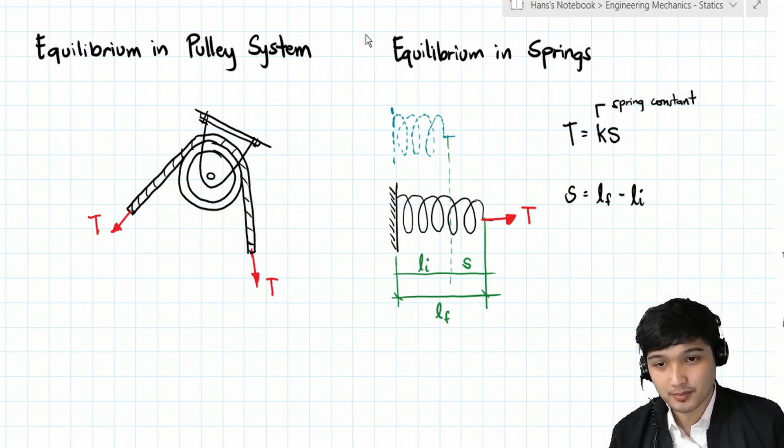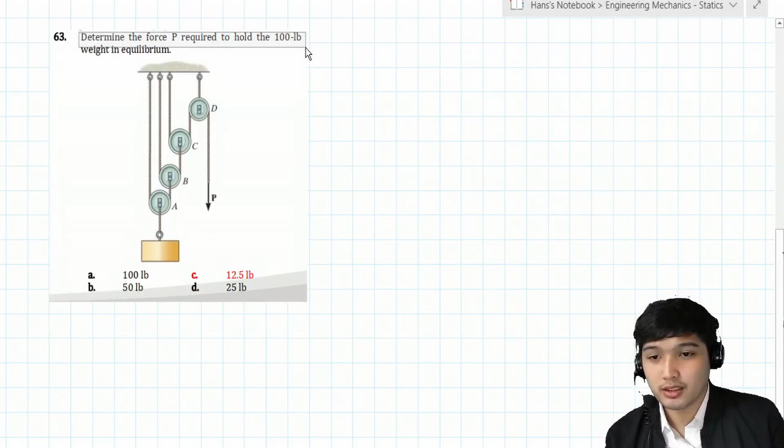Let's start class. Number 63: determine the force P required to hold the 100-pound weight in equilibrium. So here's the 100-pound weight. How large must this force P be to lift it?

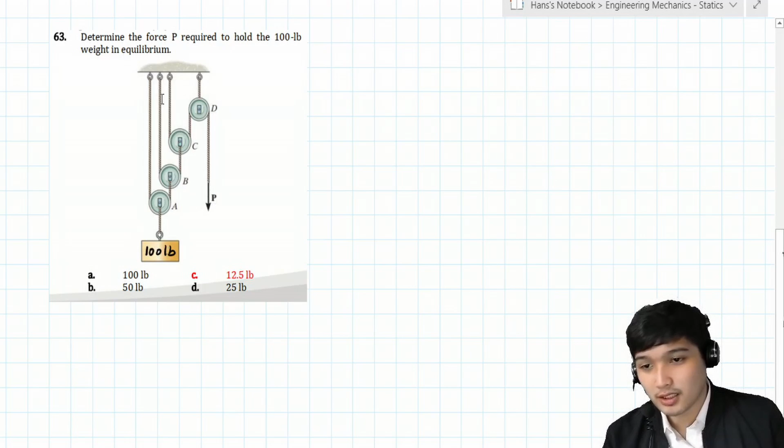To solve this, we analyze pulley by pulley. We cut it out, extract it, and analyze each pulley. Let's say for example we want to analyze pulley D first. Here it is, we cut it out and extract it.

Now we have here the downward force, which is force P. By property, it has a continuation, so as long as it's continuous, the resulting tension will be the same, P, by the property of the pulley.

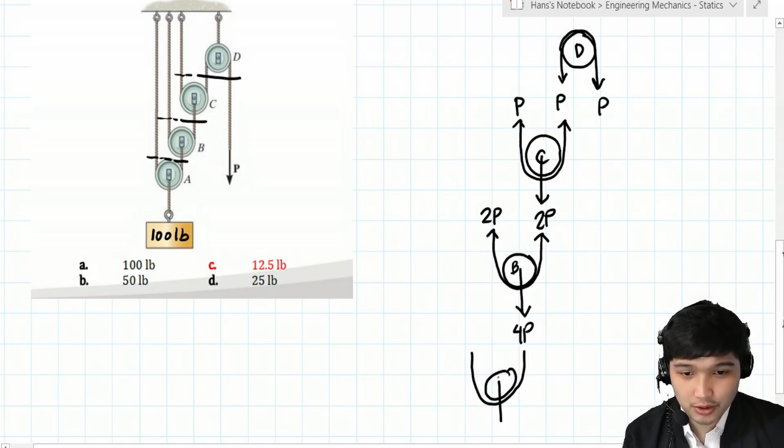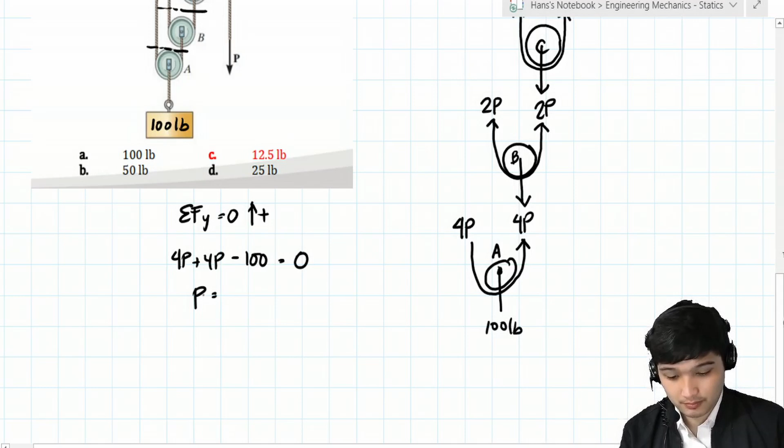So here, class, summation of forces along y should be zero, considering upward forces positive. Our analysis is on pulley A: that is 4P plus 4P minus 100 equals zero. With that, very simply, we get P, and that equals 12.5 pounds.

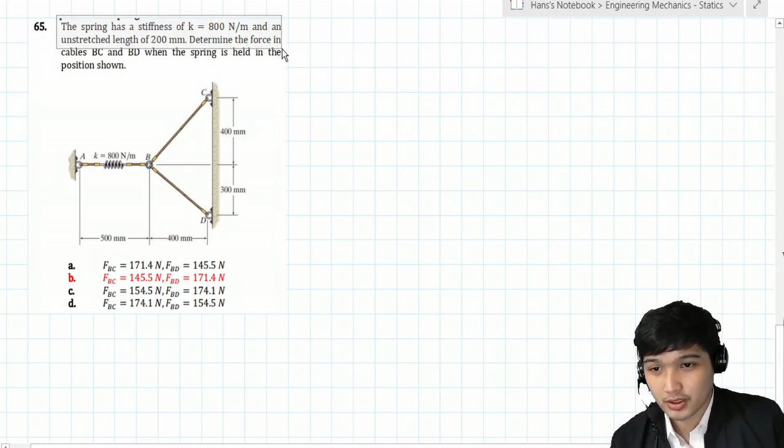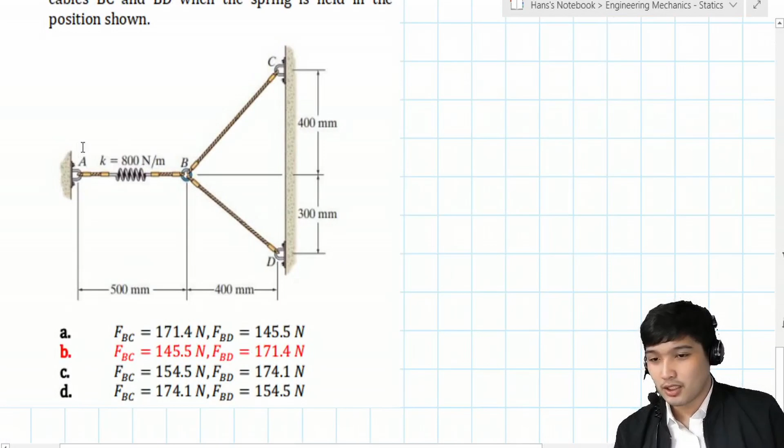Yung initial length niya, define na lang natin as LO or Li. Initial is 200 mm. Ngayon, ano nakita mo class? Mukhang na-stretch siya, tingnan mo yung spring dito. Ang naging bagong length niya is 500. So, lagay natin L final 500 mm.

So, kailangan natin makuha class yung tension sa spring. Actually class, yung sa spring, hindi naman siya always na tension lang palagi, pwede naman siya makompress. Kapag tension, yung makukuha mong S, yung deformation is positive, kaya Ks, K times positive value ng S, positive value, meaning tension. Kapag naman nako-compress, yung S na makukuha mo is negative, so K times negative value ng S, ibig sabihin negative value ng force, compression naman yun.

So, in this case, kaya natin kunin yung S, that is L final minus L initial. 500 minus 200, so that is 300 mm. Gawin na nating meters, 0.3 meters.

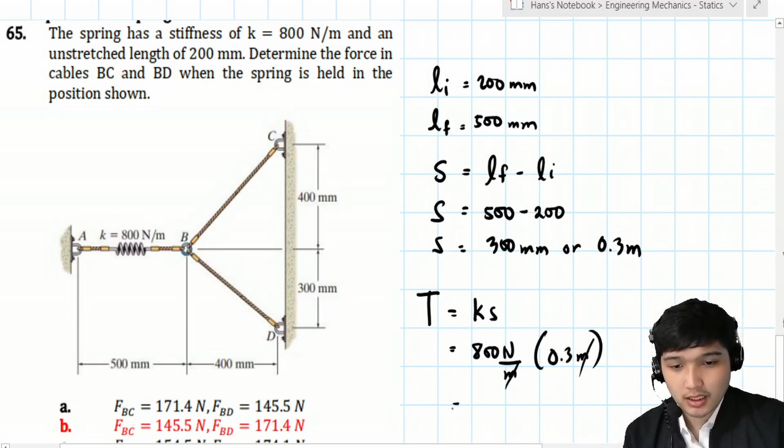Therefore, we can now solve for yung tension sa spring, which is Ks. K given 800 Newton per meter and then S is na-solve 0.3 meters, cancel ang meters, matitira in Newton. So ilan ang tensile force doon sa spring? That is 240 newtons. Nakuha na natin yung tensile force sa spring, pwede na tayong mag-analyze ng joint.

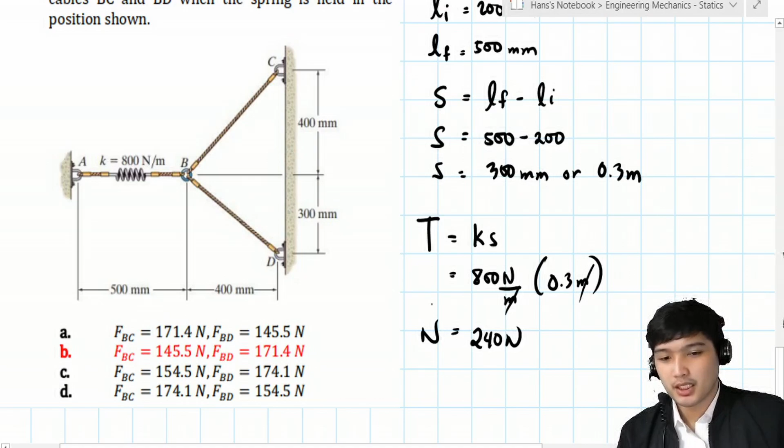So let's try to analyze itong joint B. Joint B tayo, class, ito drawing natin yung joint B. So drawing tayo ng free-body diagram. Ito yung B, attach sa B yung spring, so syempre tensile, away yung direction ng force dyan. Ito yung T na 240.

Ang gagawin kasi natin dyan, ikakatam natin tong B and C para malaman natin yung magiging internal force sa kanila. So mangyayari, kung hinihila mo pa ganito at pinutol mo yung member BC at BD, edi mapupunta siya dito. So ang gagawin nila, magre-react sila, hihila sila pabalik, so therefore magiging pa ganito sila. Considering yung joint B, magiging pa ganyan siya. Ito pa ganun din, kasi hinihila natin, pinuturin natin yan. Hinihila natin, so mag-react silang pa ganun.

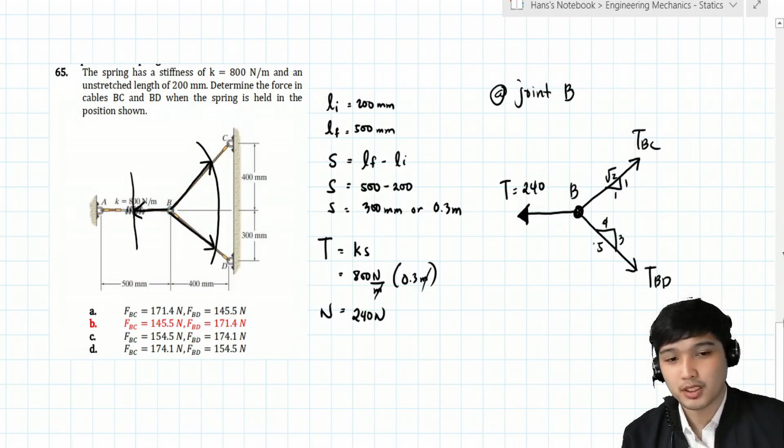So, therefore, ito na yung magiging tensile force sa BC saka sa BD. Ngayon, kunin lang natin yung mga slope siguro kasi wala namang binigay na angle. Para sa taas, 400, 400, so para siyang 1:1, and then ito, square root of 2. Dito sa baba, ano nakikita mo? 300, 400, so 3, 4, this one is 5, 3-4-5 triangle. So, therefore, pwede na nating i-analyze yan.

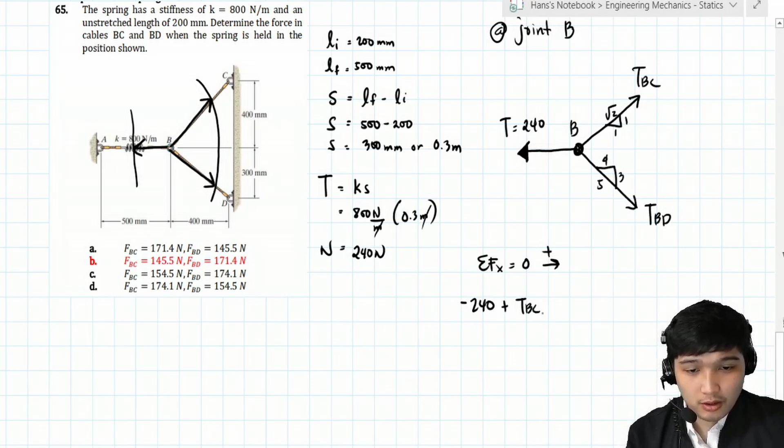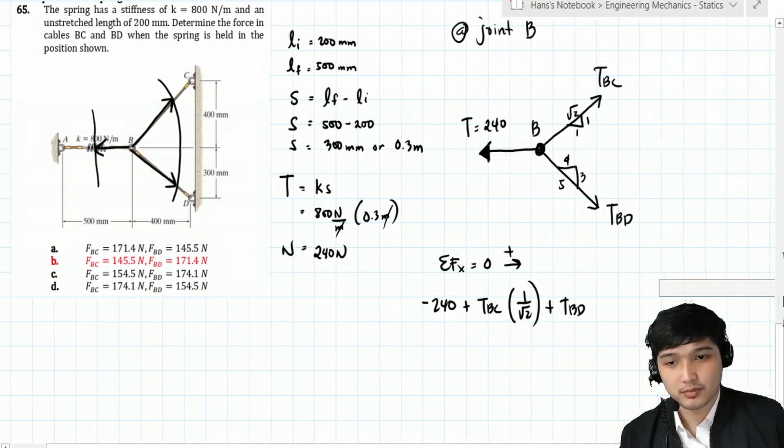Una, yung first equation of equilibrium, summation ng forces along x equals 0 considering force to the right positive. So, therefore, negative 240 plus yung TBC, ang horizontal component niya ay 1 over square root of 2, and then plus yung TBD, ang horizontal component ay 4 over 5, and then equals 0. So, therefore, we have equation 1.

Next, summation ng forces along y equals 0 considering upward forces positive. Yung 240, wala siyang vertical component. Yung TBC, meron, that is 1 over square root of 2. And then, minus yung TBD, vertical component is 3/5, and then equals 0. So, equation 2.

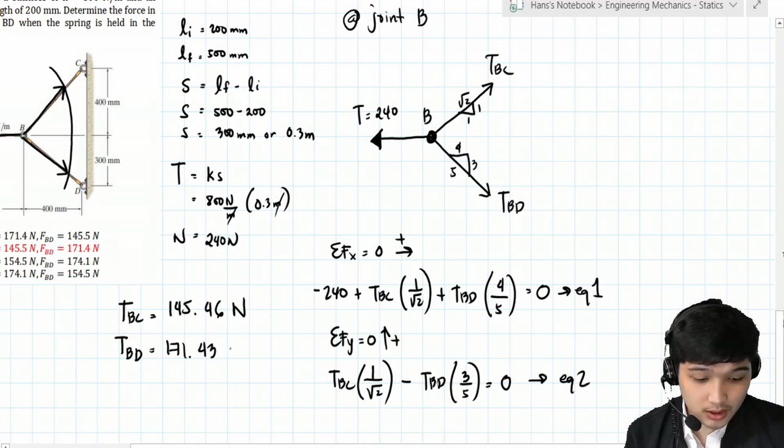So, two equations, two unknowns, class, solvable lang TBC and TBD. So, ilan yan, class? Sagot for the first one is 145.46, the unit is naka-newtons tayo. And next is 171.43 newtons.

So, from the choices, anong sagot? FBC, FBD, so 146, 171, so that is letter B. So, therefore, we are correct. So, ganun lang siya kasimple, so long as alam mo itong property ng spring naman.

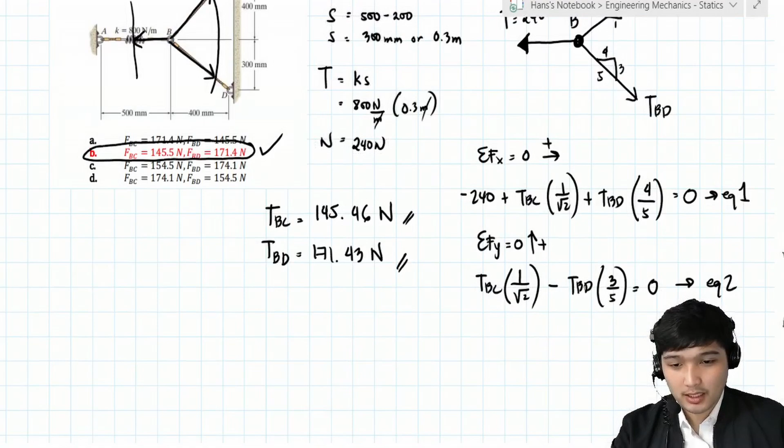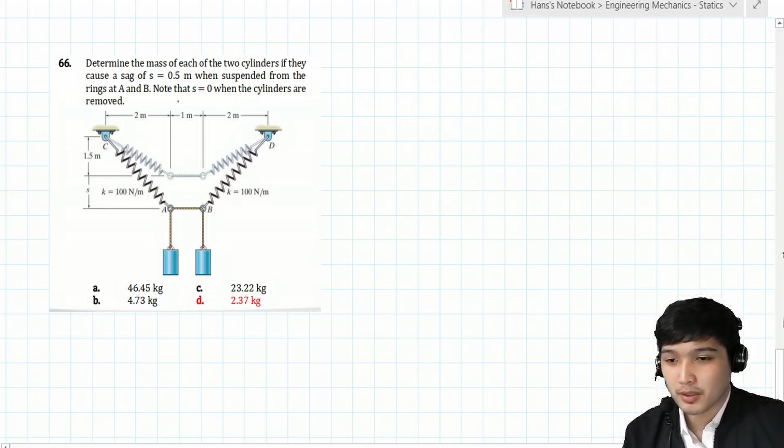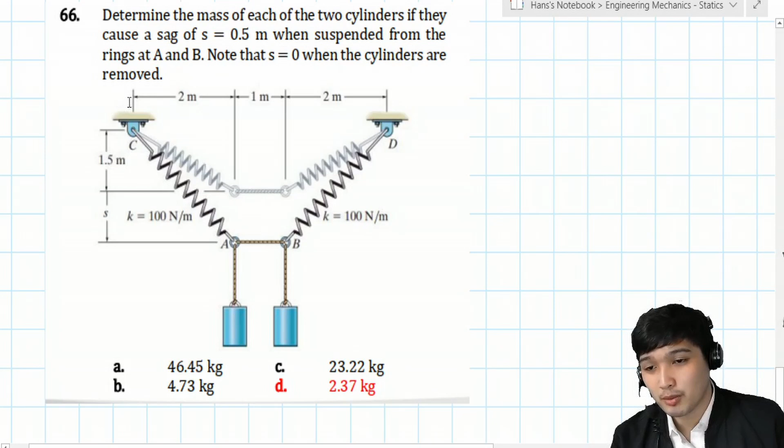So, we are given yung parang makikita mo sa background, yung malabo, parang yun yung original position, yun yung unstretched length nung spring. So, meron siyang vertical distance na 1.5, na 2, na horizontal. So, kaya natin kunin yung L initial, L initial is just yung Pythagorean ng 1.5 squared plus 2 squared. Okay, so ilan yan?

So, that is 2.5 - yung initial length niya. So 2.5 meters. After ma-apply yung load, yung bigat ng cylinder, humaba siya. Naging yung S equals 0.5. So ito na yung bagong triangle.

Okay, ayan na. So again, 2 pa rin yung horizontal, yung vertical lang yung nagbago. So makukuha natin class yung final length. May Pythagorean. L final equals - vertical na naging 2, and then yung horizontal na 2 pa rin. So ito magiging 2 square root of 2 meters.

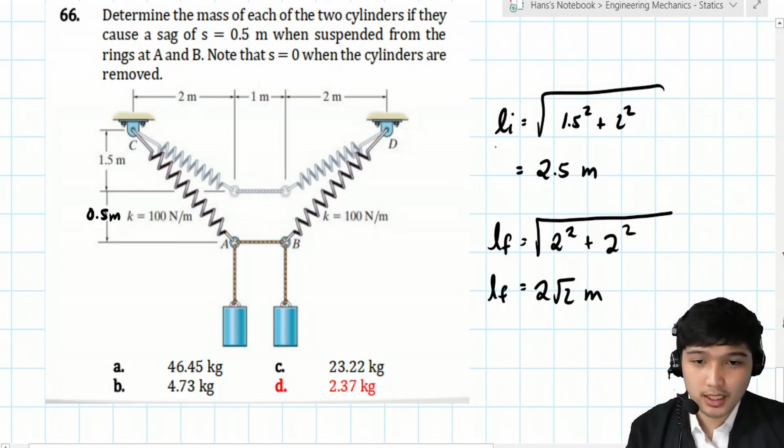So ayan, with that, kaya na natin kunin yung actual deformation na S. Nag-elongate siya, so sabihin nag-undergo siya ng tensile force. So L final minus L initial, 2 square root of 2 minus 2.5. Okay so ilan yan class? That is 0.3284 meters. So pwede na yan, class.

Kailangan lang natin magkaroon ng value ng S. So kung meron na tayo nito, therefore yung tensile force acting dun sa spring is equal sa Ks. We are given ba ng K? Meron, class, 100. At kung mapapansin mo class, yung figure natin symmetrical siya. Kung ano yung nangyari sa left side, yun din dito. So malaki yung chance na equal lang din to yung dalawang to, class.

Okay, hindi na natin papahirapan, nakita naman natin na symmetrical. So pwede natin sabihin na yung mass dito or yung weight dito, weight at A ay equal sa weight at B. Pwede na natin siyang tawagin, lagyan natin, ito by lang to observation. So we can say that yung weight as weight na lang, W.

Okay, balik tayo sa tension or tensile force dun sa spring. So K is 100 Newton per meter, and then S is 0.3284 meters. So yung tensile force is 32.84 newtons. Cancel to.

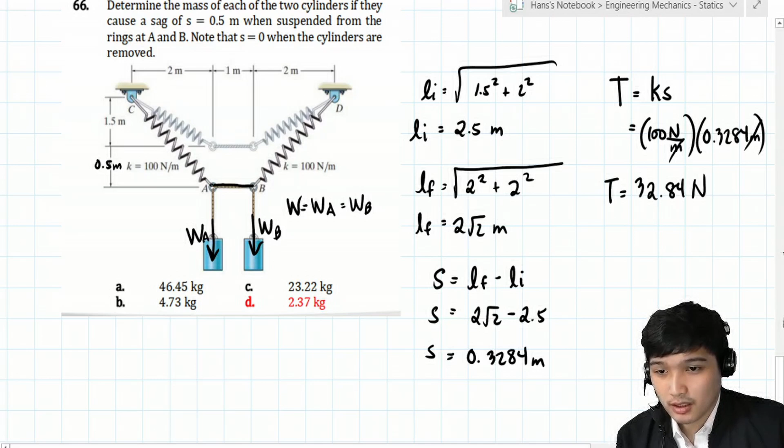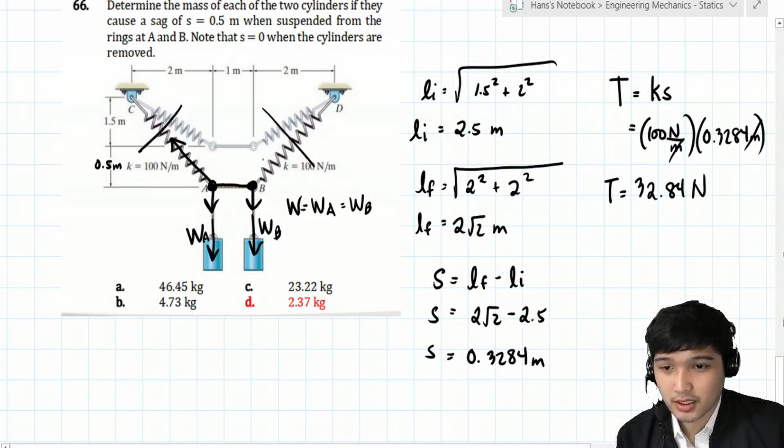So ibig sabihin, if we will try to analyze yung middle portion, analyze natin to, yung A, B, tapos dito may weight, and then puputulin natin tong yung spring. So lalabas yung mga tensile force, ganyan. Pwede natin i-drawing yung free body diagram niya. Ano yung free body diagram niyan? Dito na lang sa baba. Kung sino lang yung mga pinutol natin, yun lang yung maglalabas ng mga forces. Yung hindi pinutol, walang lalabas na force.

So nandito yung T ng spring, and then dito yung weight ng A saka yung weight ng B, na equal na nga lang kaya W na lang sila. Ngayon, anong slope neto, class? Nung sa T, ayun yung slope niya, no? Yung final, 2:2 yan. Ito 2, ito 2. So 2:2, or in simplified form, 1 over square root of 2. So ganun din dito, 1 over square root of 2.

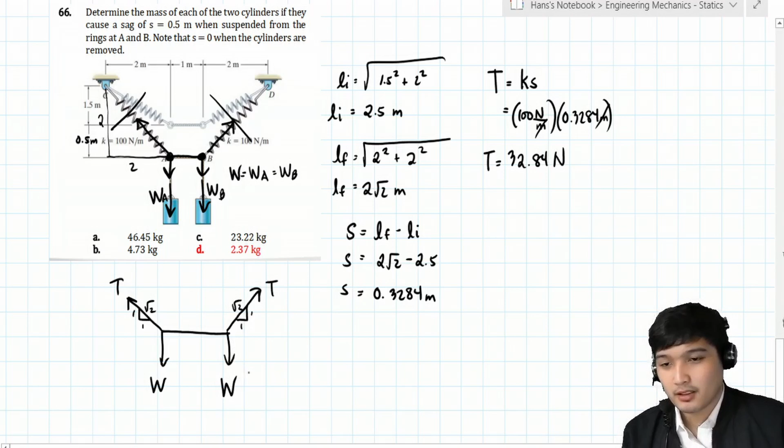Okay, so finally, para masolve natin class yung W, we just simply take summation ng forces along Y. Dapat 0 yan, class, considering upward forces to be positive. So yung T, may vertical component siyang 1 over square root of 2, at 2 times yun nangyari, so times 2 ko na lang. And then minus W na 2 beses rin nangyari, and then equals 0.

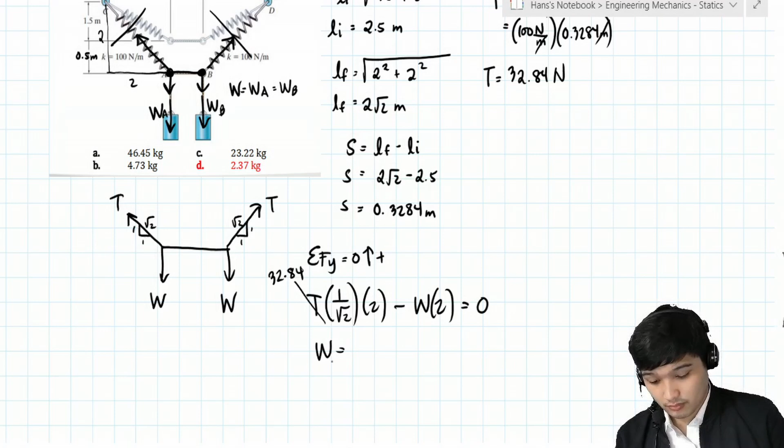Okay, so meron tayong T, palit natin to 32.84. So solvable ang W. And then that is how much? So W now equals 23.22, and then the unit is naka-newtons. Class, wag magpadalos-dalos dahil ang 23.22 ay nasa choices.

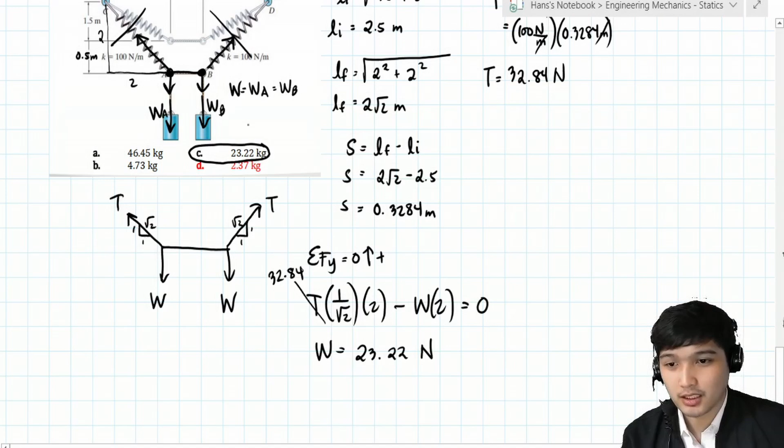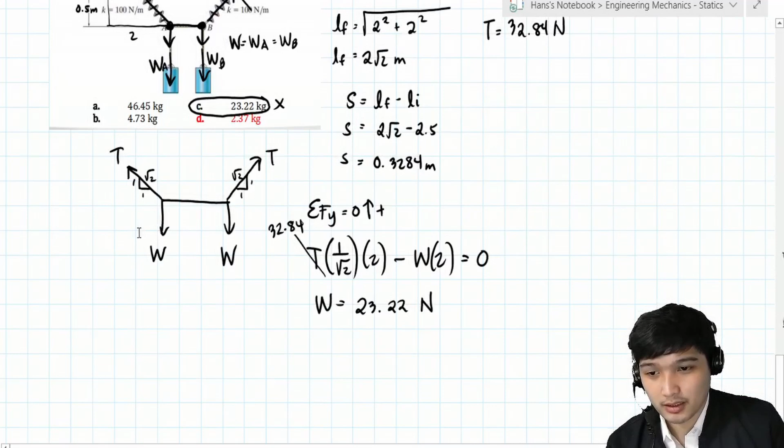At hindi yan yung tamang sagot. Okay? Kasi tinatanong is, mass, di ba? Determine the mass. Class, ang nasolve natin, weight yon kasi naka-newtons. So therefore, ang mass or yung weight is equal sa mass times gravity. So therefore, mass equals weight over gravity.

So wag magmamadali, ilan ang sagot dyan class? Ayan okay, over 9.81 meters per second squared. So newtons yan, so lalabas dyan naka-kilograms. So ilan ang sagot? So sagot is 2.37 kilograms. And ang correct answer natin dapat ay yung letter D. Okay, so that's the correct answer.

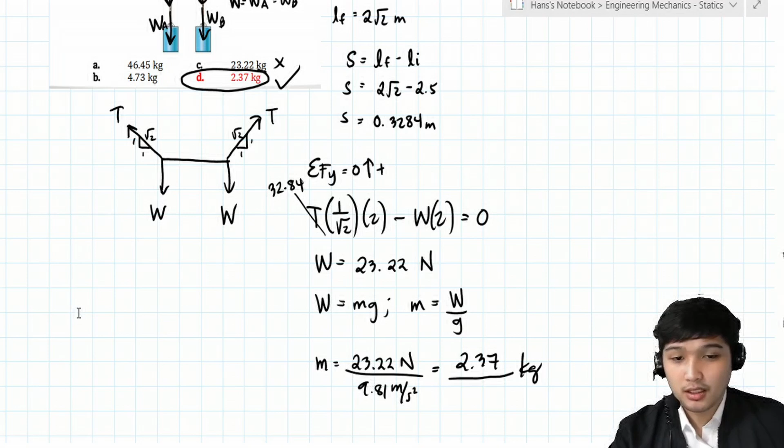Okay, so ganun lang siyang kasimple, class. Yan lang ang magiging sample problem natin para sa topic na to. So sa next video, class, pag-usapan naman natin paano naman yung equilibrium ng forces in 3D.